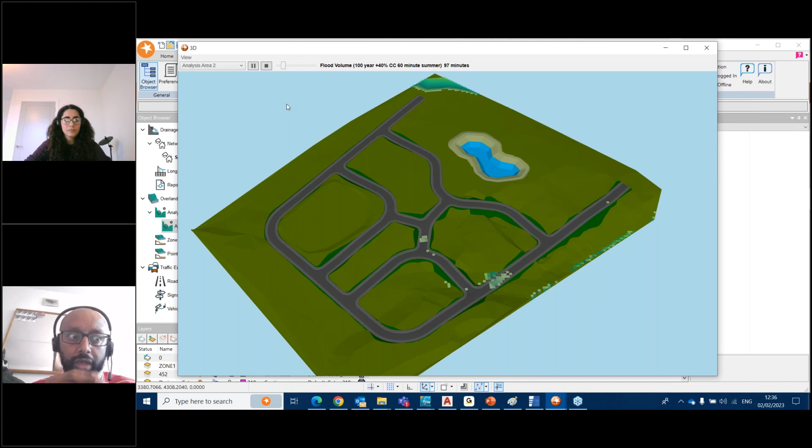So really important questions to address are overland flooding analysis, ground modeling, and pre-development assessment you could do for a site. We grouped them together because they work within the Flow software as well as the other graphical tools we have, so I'll go through the design processes methodically.

Before we start, it's worth mentioning there's a product called Live Design that allows you to do ground modeling, road design, alignment design, drainage design, overland flow analysis, and traffic management system, all integrated holistically. As you adjust one aspect, everything else cascades accordingly. That's still work in progress.

To answer the specific question about incorporating ground models, you can use ground modeling tools, and that means the ground model will exist in the background. I'll show you later about smart tools and smart surface, where you can also provide surface level elevation data for your drainage system.

We also have something called PDS. For those already familiar with it, it allows you to do road design as well as ground modeling in more detail than Live Design currently provides. So you can originate from any of those three tools, and the ground model will then be part of your drainage system.

That's one aspect. Dealing with overland flooding analysis is where I think I can demonstrate more effectively, given we have the ground model. At the outline stage, when doing a preliminary assessment of a site, it's a good idea to look at the discharge rate based on pre-development calculations.

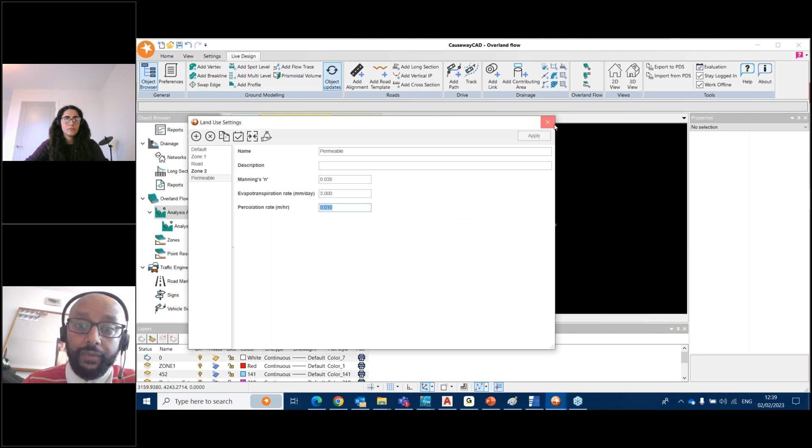To do an overland flow analysis, all you have to do is make sure you have a land use setting that allows you to set up things like the type of land you'll have, whether roughness, evapotranspiration, percolation rate, infiltration, etc., applied per zone on your site.

You'll also have what we call styles, where the display that's generated shows specific depths associated with a specific color, and you have the chance to adjust the depths, velocity, and hazard bands - all of this can be adjusted.

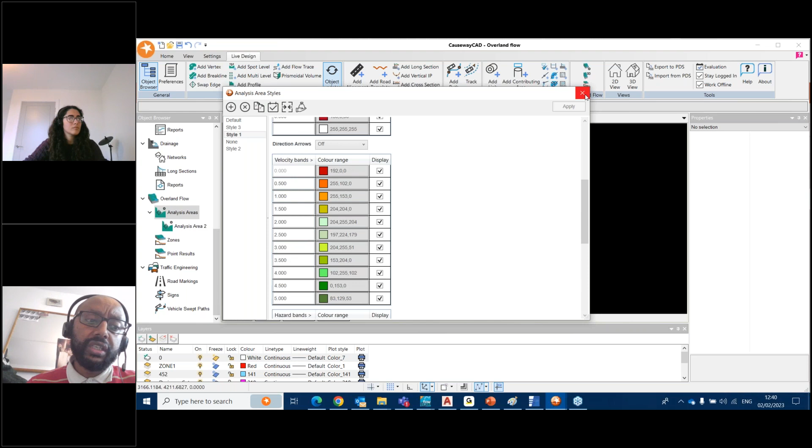All you have to do is select an add button, which allows you to add an analysis area that can then be adjusted - you can move it about and adjust it. You also have the chance to adjust the boundary conditions, whether closed or open boundary, etc., and then run the overland flooding analysis.

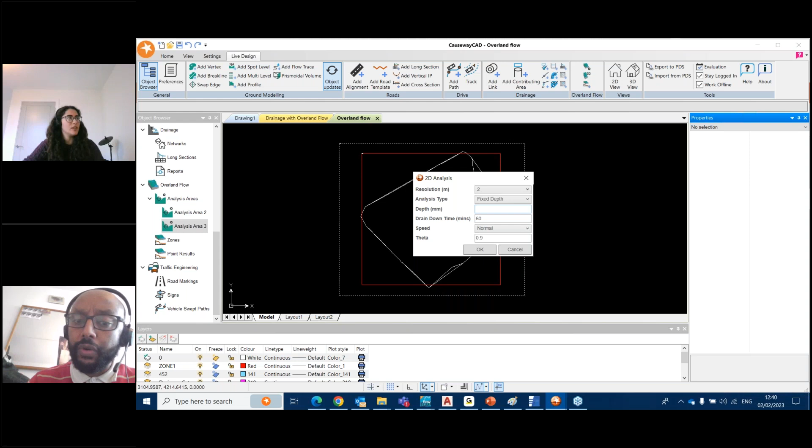If you run an overland flooding analysis, it gives you the chance to adjust things like the resolution, whether you're going to have a fixed rainfall in millimeters, or a specific rainfall profile applied on the site. You can also use synthetic rainfalls, and you have the chance to specify things like the drain down time, how long it's going to run for, and what type of analysis speed it's going to be run at. Once you've done that, it takes a little bit of time.

It gives you the chance to have an overland flow route for your site. That then means you can look at what type of velocity, what type of depth is generated, and where the flow goes.

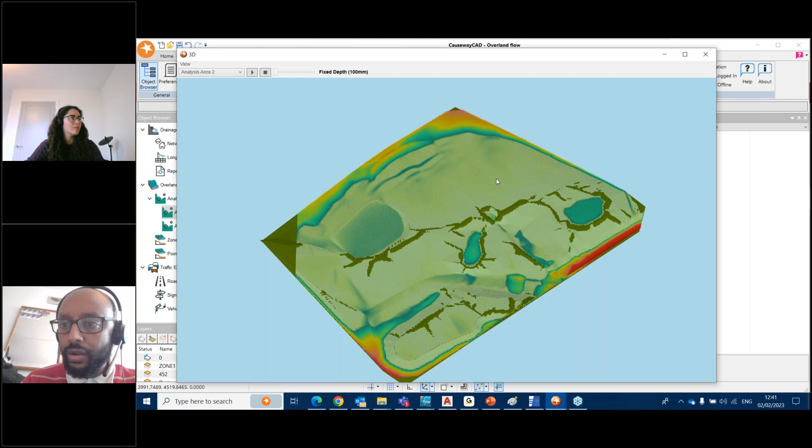Sorry, let me message... Okay, he's back. Sorry, you just had about 10 seconds of delay there as the overland analysis was running. Okay, sorry about that. Screen's back now, so you're all good. Yeah, it's... I don't know.

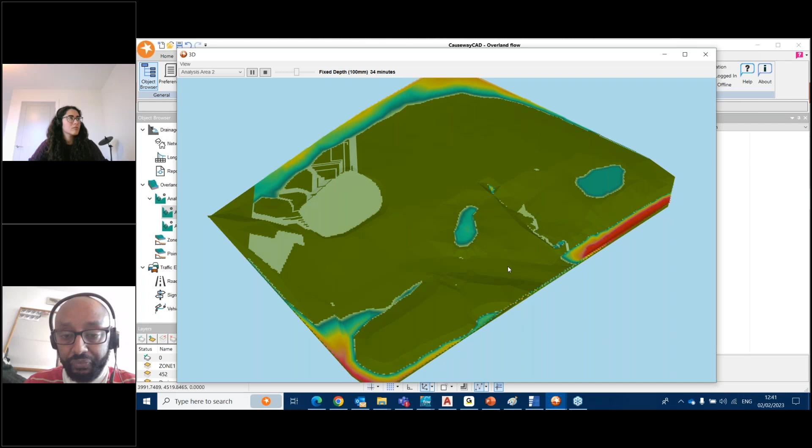Sorry about that. So it just allows you to run overland flow routes where you'll be able to identify what's called blue-green corridors, natural hydrology, where the water is going to gravitate towards. You can pretty much use that as a tool to decide where you could place your sustainable drainage structures, etc.

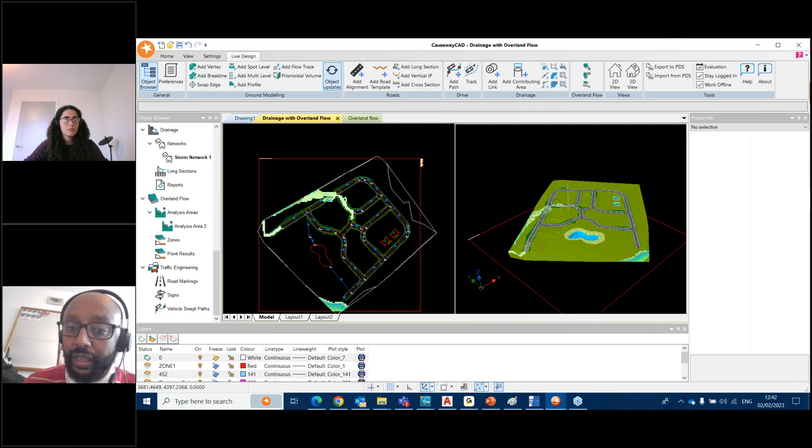That's one thing worth mentioning: if you have flooding from an already completed drainage system, and that flooding needs to be demonstrated to be contained within safe zones or public open spaces, you have the chance to also run overland flow routes based on the flooded volume. So you should be able to run what we call flooded volume associated with the critical storms that cause those floodings. All of that is something you can do from an overland flood analysis point of view.

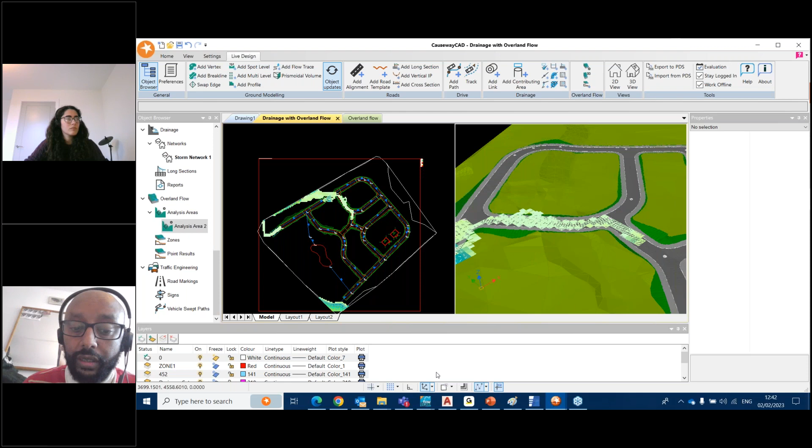From the outline drainage design point of view, what you could do is use what we call Sketch. If you notice in Flow, the design tree view on the left-hand side is structured to follow the pattern you'll use when you do design. So Sketch comes first, then simulation settings, then detailed design. That's on purpose, because Sketch allows you to do an overview, or think of it as preliminary outline, concept design of a scheme for your site.

That means you'll be in a position to have a good idea about the sizes and dimensions of the structures, the discharge limitations that are going to be imposed, and what type of capacity you should provide. That's something you can do by cascading structures.

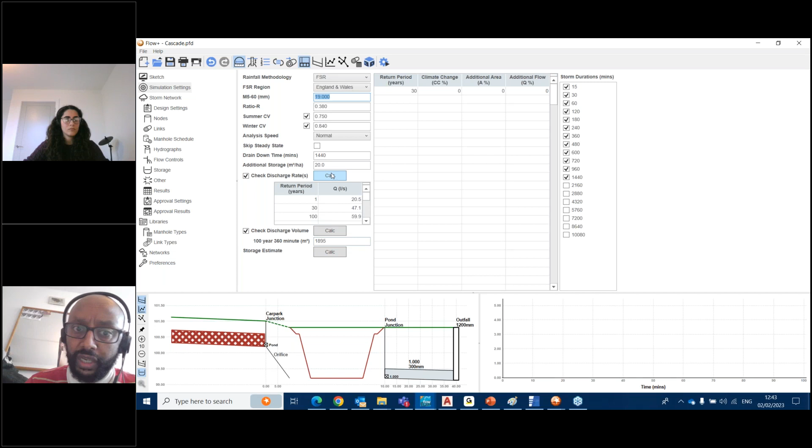In simulation settings, you could also do greenfield runoff rates, brownfield runoff rates, runoff volumes, etc., which I think there's going to be a question on later, which I'll discuss. In Sketch, you can just drag and drop storage structures. I've done a couple of them just so you could see. And one thing I've done, because there's a question about swale design, is show how you'll be able to design a link type as a swale.

This is something you can design freehand, things like the dimensions, the bed widths, the height, the auto increment, the side slopes, and the preferred cover, so you can associate it with the ground. If you select follow ground, and you have topography as mentioned in the question, that should automatically snap into the surface for you.

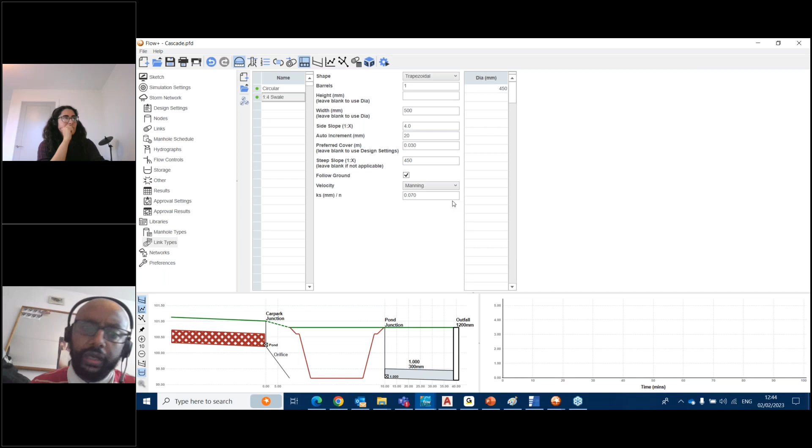You have the chance to also adjust things like the Manning's coefficient for the roughness associated with vegetation and gravel material, and there's good guidance in the SuDS manual as well as other documents on what type of Manning's value to apply. So you could basically create something like that, just so you could see, because you could technically create any type of network, any type of sustainable drainage system—these are the things we'll look at today, so we can see the full range of options available.

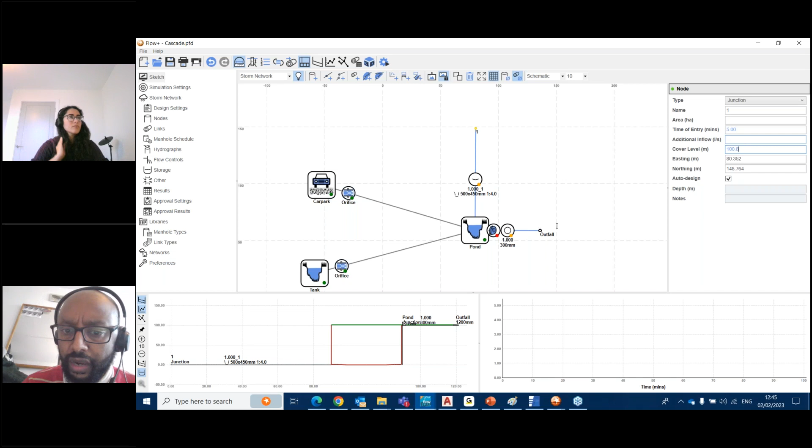That allows you to create the swale by just clicking an option, and that's something you could do with all other structures as well. This is just an example, and this then allows you to specify things like the name of the node and the cover level. Let's say I have something like that for the cover level. And you can then specify things like the lengths, because there is no coordinate or no concept of dimensions in a schematic view for outline design.

Obviously, you could do that in Live Design or PDS or Smart Tools. That basically is something you need to be in control of, and that allows you to do that. And you'll see the swale will be automatically designed, and you'll be able to also specify things like contributing areas as a node, or contributing areas as a lateral link. That basically is area coming in along the length of a link, like an open section. And this means you will be a little bit closer to what happens in reality, obviously.

And you can adjust things like the slopes by manually adjusting the level, so you can automate that. And once you have done that, you can also specify things like infiltration rate. So you can apply infiltration rate for the swale or any type of structure, which we'll discuss in more detail a bit later, because we have quite a few questions on that. And that should turn into a different color to show you we have a green infiltrating structure, if you have an infiltration. And that then means you can obviously analyze the network.

One of the most important points about the outline design is that it's going to be linked with the full hydraulic engine that is capable of modeling anything to do with 1D system, reverse flow, backwater, pressurized flow, surface ponding, surcharging, etc. It gives you the chance to model the outline design accurately. So you don't have the limitation of assuming the downstream storage structure will be oversized because there's no concept of backwater. In this case, there's going to be a backwater, definitely. And you'll see that when the water reaches a certain level, the hydraulic grade line will be straight. And that is a sign that you have backwater and reverse flow, etc.

So that means the hydraulic analysis and the results that are going to be generated, and the volume and the capacity that you are able to capture, will mean you have the confidence when you turn this into detail. There isn't going to be any surprise. There isn't going to be any major change in the capacity you need to provide. So all the structures that you can think of can be designed this way as an outline concept design, or you can use a similar concept for the detail design, which I'll show you a bit later as well as an example. Okay. But for now, I think that should capture all the four questions. Whistle-stop tour there of the outline and a sort of preliminary design.

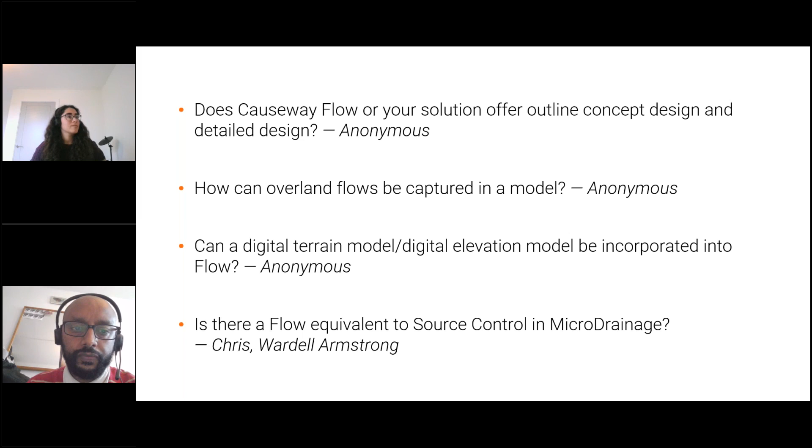Okay, next question. I want to design a pond and connect it to another pond. Is it possible? Yeah, and I think with this question, we'll have an example later, but yes, you can is the answer. Not only can you by using a link, you could actually have something like overflow loops as well.

As you saw in the outline design, you could actually connect structures using a weir or orifice or something like that, which means technically there isn't going to be any time of concentration or any time of travel. There's no concept of water inflowing and outflowing from a structure, so that connection could just be volume transfer. That's the easiest way of doing that, or you could actually connect them using links between the ponds. So that's something we could have a look at later.

Yeah, brilliant. Okay, thanks, Net.

Okay, how do you model submerged outfalls? Okay, that means I probably need to share my screen. So let me share my screen again. Right, time is going on again.

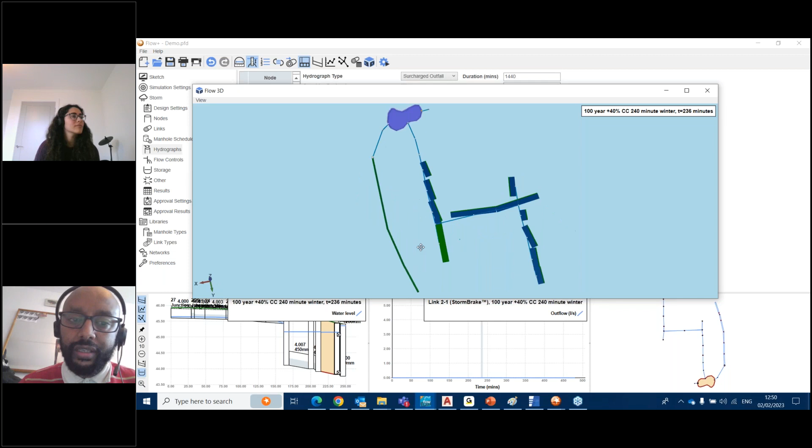Yes. So submerged outfall, that's something I prepared earlier. This is basically a cascaded system of sustainable drainage systems that you could do. This is not concept design, this is actually detailed design. What you could do is, if you go to hydrographs, in hydrographs there's many options that you could basically use to adjust the inflows or the outflows. Basically it is to do with affecting what is going in and what's leaving the network. And I'll deal with the inflows a bit later, because we have a few questions to deal with that.

But when it comes to the outflow, the surcharge outflow, specifically the question about submerged outfall, if you want to essentially adjust the outflow, what you need to do is select the Surcharged Outfall, specify the duration of how long it is going to be submerged for, or you could actually specify any random one. It doesn't matter. The main thing that matters is the time step and what you put in the depths. So the time step is going to be essentially, if you have differences, like in this case, I just block the outflow. Basically, the outflow is 1.649.

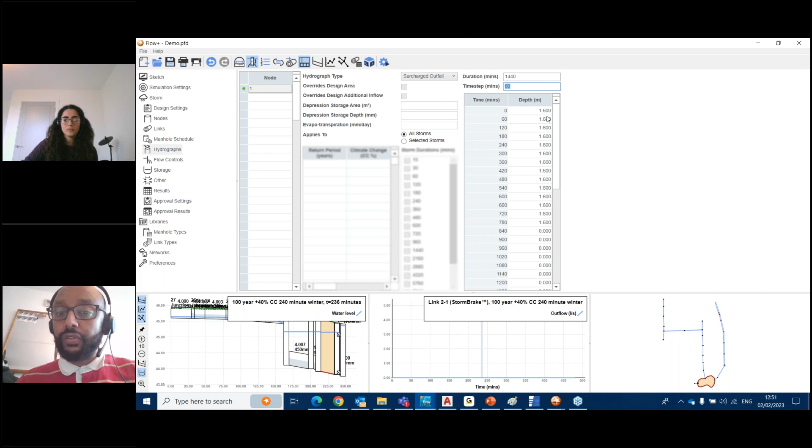You have a small pipe diameter, so that basically means, as long as the hydraulic head is at that point, it will block the outflow. And that's going to be blocked for 780 minutes, for example. This is actually a very active project that I help support. That was a drainage system discharging into a coast, and they were told there is going to be a tidal wave that closes the discharge for about 780 minutes.

So what you could do is just say, I'm going to close it for 780 minutes by making sure that depth is close to the cover level. That means you always assume there's going to be a flap valve at the outflow. So it's going to close the flap valve for the 780 minutes. So when you run the analysis, you'll see the discharge is going to be 0 if you have less than 780 minutes, like in this case 240 minutes, you'll see there's 0 discharge there. And the moment we go beyond that, you'll start seeing discharge that's going to appear after the 780 minutes, as you can see. So there's going to be discharge generated.

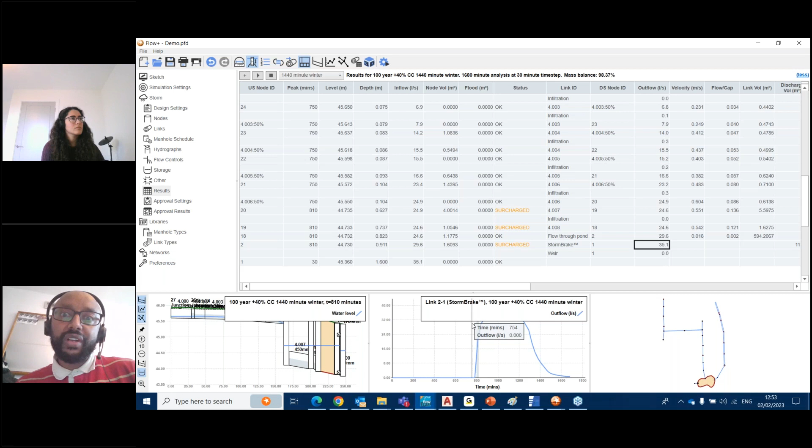So that is the easiest way, and you could vary it, depending on whether you have a full idea about the submerged outfall data that could be provided by the EA, or people who are going to manage the rivers or coast, or whoever the approval body is going to be. You should be able to have that information. So you could use a copy paste mechanism, right? Any of the spreadsheets you see in Flow, you could copy and paste using Control C, Control V. So not only the hydrographs here, but you could copy and paste your networks as well, if you like. So you should be able to transfer any information you have about the submerged outfall that you need to simulate. So that's how you do submerged outfall.

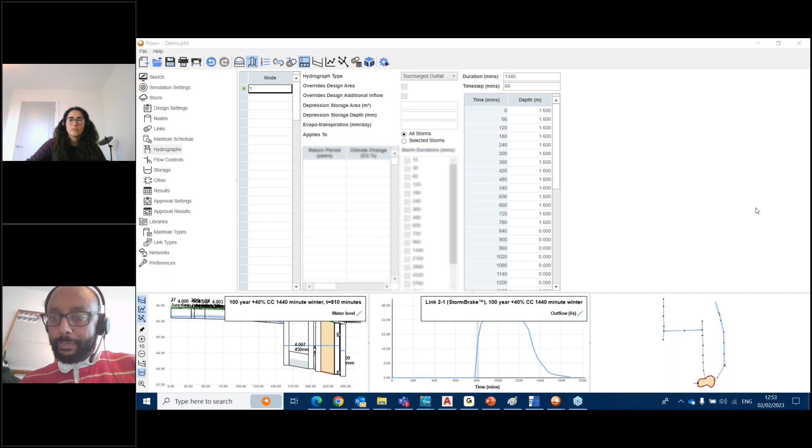Perfect. That's great. Should we go on to the next one? Yep.

Okie doke. So yeah, lots of SuDS questions before the webinar that we received. I suppose it has something to do with the Schedule 3 announcement. So, understanding what kinds of SuDS measures can be modelled. Can you set up a rain garden simulation in Flow, and green-blue roofs? So lots of different types of sustainable drainage systems. All are possible in Flow. Net, can you show us how?

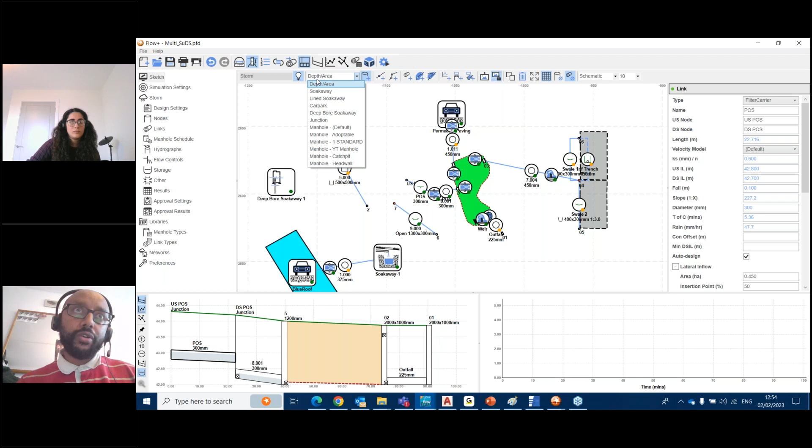Yeah, I mean, obviously I cannot cover every single thing that is listed here, but I can show you something like a rain garden. There are different ways. The main thing to recognize about Flow is when it comes to sustainable drainage systems or any type of storage structure, you could design them using very few templates that we have. I think this is something we will need to ask your feedback for. So if you have a very strong opinion about having a template, please let us know, because we are considering it. But so far, our approach has been to make it as open as possible.

So you could design the traditional way, where you'll be able to place storage structures like a depth area, which allows you to design anything. Then soakaways, lined soakaways, car parks, deep bore soakaways, which are basically templates that allow you to have specific types of structures, and everything else which should be captured within that. But it's obviously not sufficient to just say that should be the way you design it.

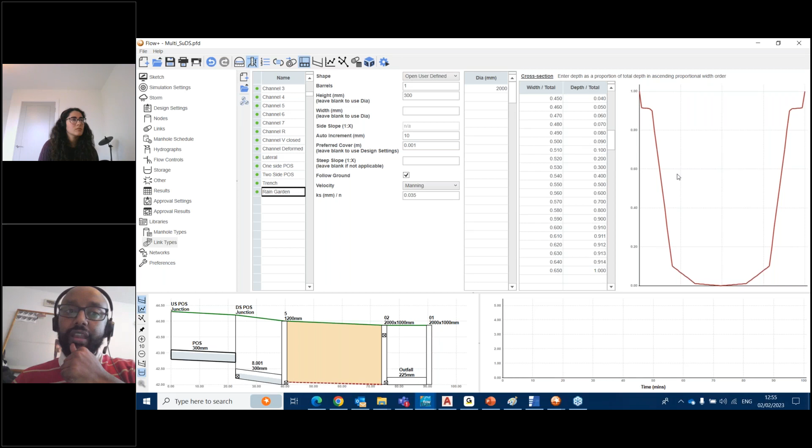We opened it up a little bit as well, because we have something called flow through pond, and we have something called link types that allow you to design the shapes and sizes. So this is one of the things that allows you to, for example, design something like a rain garden. So you'll be able to create the shape similar to what we have done earlier, and design things like a rain garden.

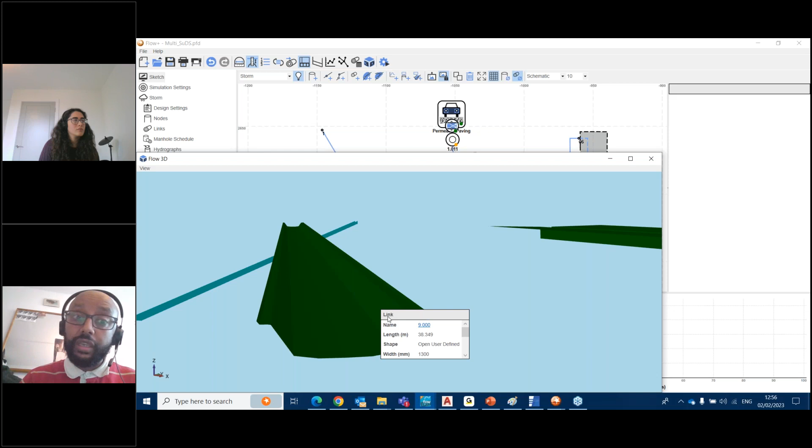You could incorporate it as part of your main drainage or detailed drainage, if you like, but I'm just showing you here. And if you do it as a link, it means if you have a different porosity rate, you'll have to consider that porosity by resizing the shape. And just before I conclude that, it should also mean you'll be able to make that infiltrate, right? So similar to what we have done earlier, you can apply infiltration rate, etc., to a rain garden.

But you could also use what I call a flow through pond, right? Flow through pond is one of those important structures that is worth talking about, because even though it says it is a pond, think of it as a flow through any structure, because it allows you to create any shape you like. So if you have a shape that is going to look like, let's say this, just outline it. You could outline the shape, by the way, in Smart Tools, in Live Design, in PDS as well. And as you go through outlining the shape, it will actually be updated for you.

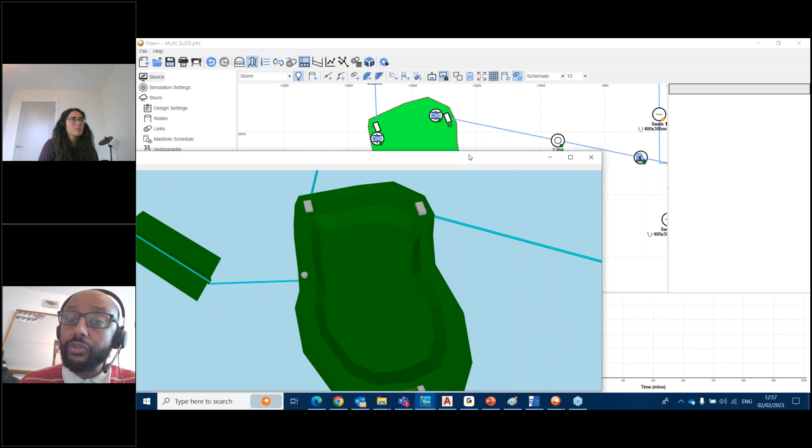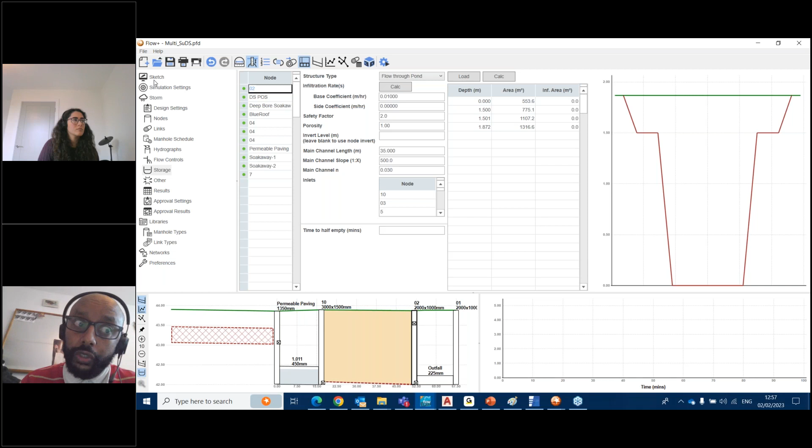It allows you to have, as you can see, the inlets in their true geographical location, the outlet in its true geographical location. You should also see things like main channel length, average slope, and Manning's, the roughness associated with the different types of vegetation and gravel material you could have. So you could use these as well if you like, but you could shrink the size and create the shape. And that also means you'll be able to specify things like the porosity rate, etc. So that is something you could use as a rain garden as well.

There is also a question about blue roofs, green roofs. One of the main important aspects of things like blue roof, green roof is to consider what is happening to the rainfall before it gets into the drainage system, to either be stored in a crate or go to the downstream end. And there is what I call blue roof, but you could interchangeably use it in some instances. There isn't specific guidance out there. That's the reason why we don't have a specific template to say this is how you should use it.

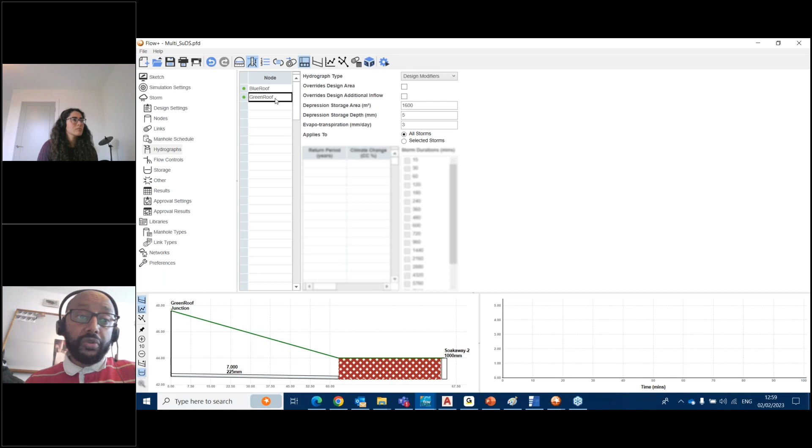But what you need to consider, if you want to consider the elongated inflow, because the water has to percolate through different membranes, soil or other manufactured membranes, is an elongated inflow. And that is something you could do by going into hydrographs and adjusting the time area by specifying the duration and the time step. You could also specify things like depression storage and evapotranspiration for the losses. There is also the possibility to ignore all of that and assume you have saturation, worst case scenario, and just say there's going to be some depression storage and evapotranspiration, without an elongated inflow. Anywhere between the two is basically the right approach.

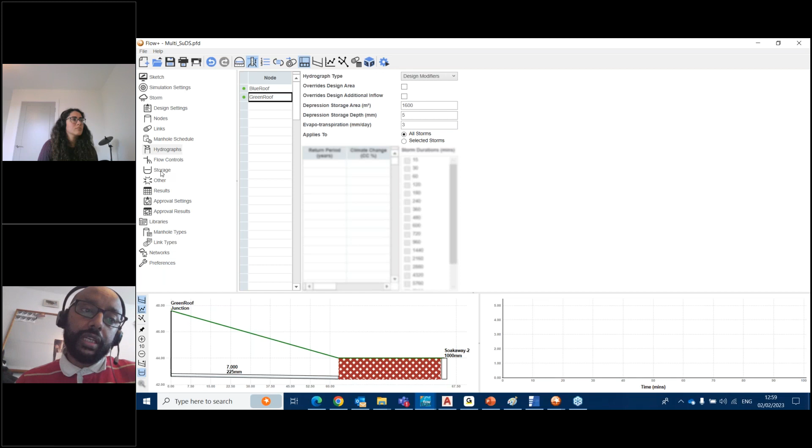And hopefully there's going to be guidance soon, because I know they're working on it, CIRIA is working on it. So once we have that, we will have authoritative guidance so we can implement it in the software. So we're waiting for that basically. Nowadays with blue roofs, there is something called a crate that you could put on the roof. I don't know if you are aware.

So that basically allows you to store the water, and you'll be able to specify that as a car park, or you could obviously use any of the other mechanisms as I showed you, but this allows you to represent the storage capacity you have on the roof, and you can obviously limit the discharge from the crate as well using flow controls.

So those are really the main approaches, but obviously the devil is in the detail, and this is something we can go through when we have a little bit more time. But it is possible, as you can see, to design any type of blue roof or green roof, but you just need to have an understanding of how the software is able to work instead of a template to look for, right? So that's the main thing to remember. There are obviously many different ways.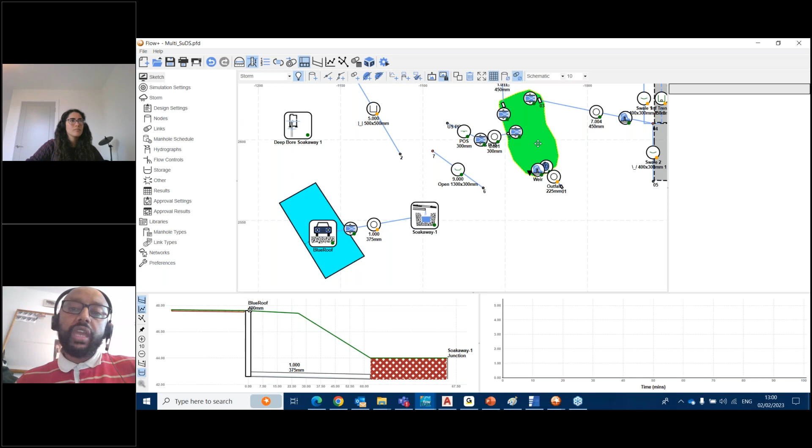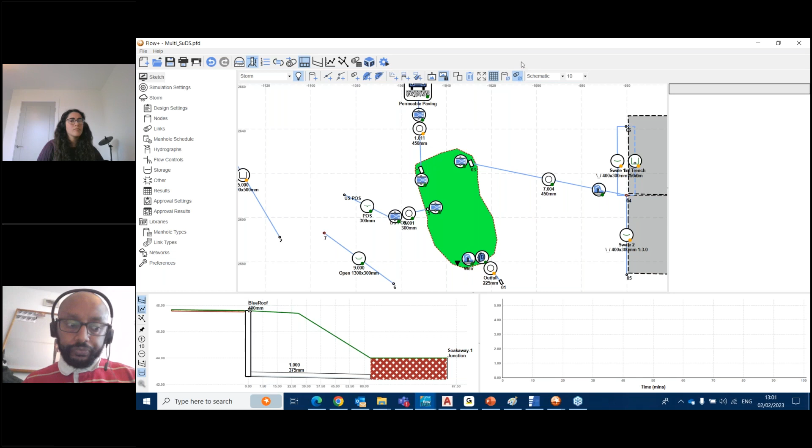One last point to make before I conclude: when it comes to storage structures that you design, if it is very important for you to make sure the inlets and the outlets are in the true geographical location, not only a representation of what the dimension looks like, it's very important to consider flow-through ponds. Even though it says it's a flow-through pond, it's actually a structure. Think of it as any structure, because you could adjust the depth area table and adjust the dimensions. So that should allow you to represent any type of storage structure, basically. So I hope that answers the question.

Thanks, Ned. Just got a live one that's come through that might be worth answering now as well. Does that mean it's possible to model two separate outfalls into a soakaway as well? Absolutely. Yes, 100%. You could have as many outflows as you like.

There's a question about Flow Plus, which I'll answer later, but with Flow Plus, you should be able to do what's called multiple outflows. That means outflowing into a watercourse or main drain or whatever. But you should also be able to outflow into a soakaway or a pond or bioretention in multiple directions, and that's basically what a flow-through pond considers. So yes, that's correct. Brilliant. Thank you.

Okay, should we go on to the next one? Yeah. Let's go for the next one.

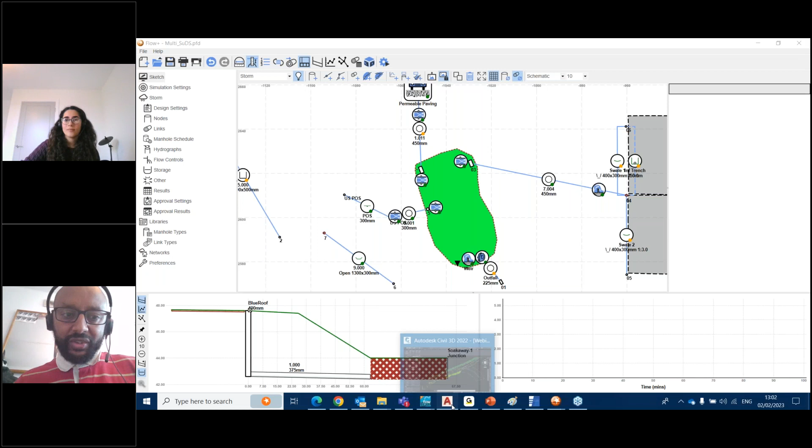Good stuff. Okay, so we had a few questions on smart tools. Can surfaces from Civil 3D be incorporated and then cover levels assigned from these? And then another one around importing surfaces. So I think that requires another demo. Yes, absolutely. Let me share my screen, and you should be able to see my screen.

For those of you who are not aware of smart tools, we have a module that works embedded in AutoCAD or Civil 3D. Both AutoCAD and Civil 3D have the same workflow. The only difference with Civil 3D is you'll be able to incorporate the surface live, and you'll be able to import a Civil 3D network too. So that's the only difference, but all the ribbons and icons are the same.

So smart tools allows you to do an outline design as well as a detail design, as well as drawing production, pretty much everything you expect from a graphical interface. But the BIM output is what makes it stand out, because it allows you to have a full BIM output that contains all the constituents of your design, not only the hydraulic aspect, but also the construction aspect, things like the bedding, the surround, the trench size, the backfill, the material, the thickness. So that's something that is important to point out.

But coming back to the question, it comprises smart surface that allows you to incorporate surfaces from Civil 3D, or the ground modeling tools that you saw earlier from Live Design or PDS, which you can use by selecting the surface from Civil 3D option or surface from 3D faces. If it is Civil 3D, to answer that question, you should be able to select that, and that imports the Civil 3D surface. If you have it open, it should be live.

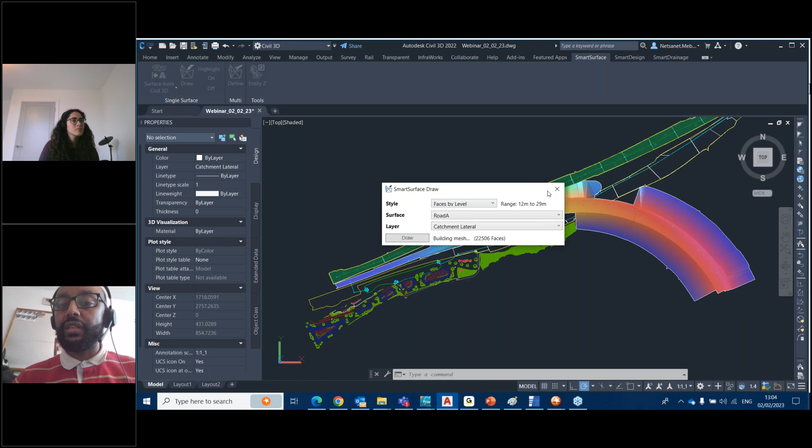We have road A and road B. And once you have incorporated the surface, you should be able to essentially show the height map so that you can see where the surface is and so on. So you'll be able to see, for example, in this case, I have an overpass and underpass, and that's something you could easily understand and visualize, etc.

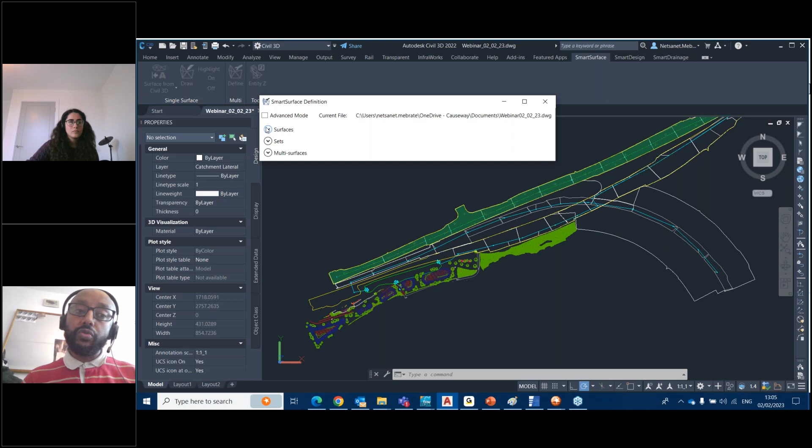What makes Smart Surface smart is not only that it allows you to load data and stuff like that, it allows you to incorporate what we call multi-surface. So you'll be able to load as many surfaces as you like. You can then combine them in different sets. So you can say, okay, this set is going to contain these surfaces. So you can have proposed surface, existing surface, and you can layer them up, so you can prioritize them.

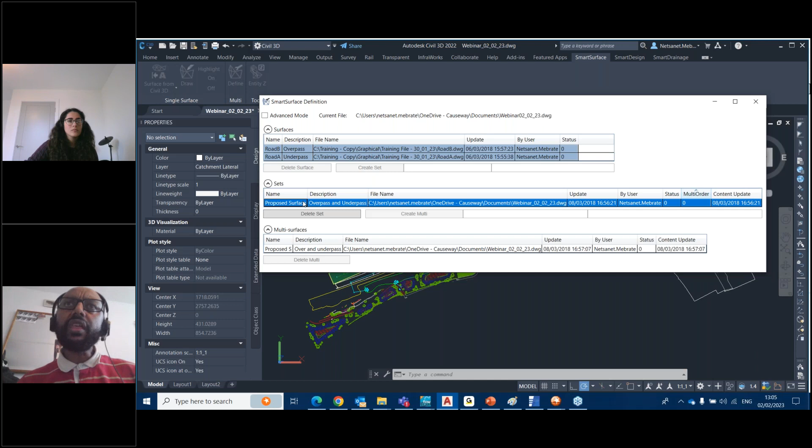So you could say, if I happen to have the drainage system at that point, please make sure you use a proposed surface instead of existing, because I prioritize the proposed. But in the absence of that, you can use existing, right? So you could adjust the priority order, and that's going to automatically give you the exact surface that you need. And you can then select the multi-surface here, or you can individually select each particular surface that you have loaded.

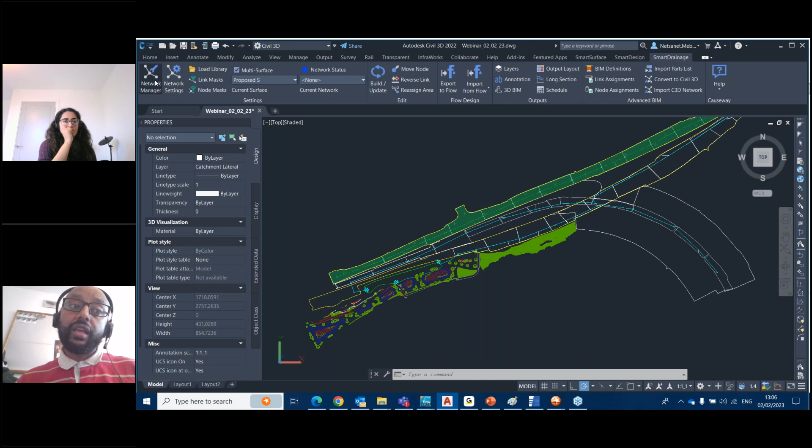And what that technically means is you should be able to model a drainage system for something like a spaghetti junction. Basically, grade-separated levels, really complex surfaces can be modeled using the surface. And with the drainage system, you should be able to use smart tools or smart drainage, so you could see how easy it is. You just need to do what we call setup of associating which layers or which line type or block is going to contain the manholes and links, etc.

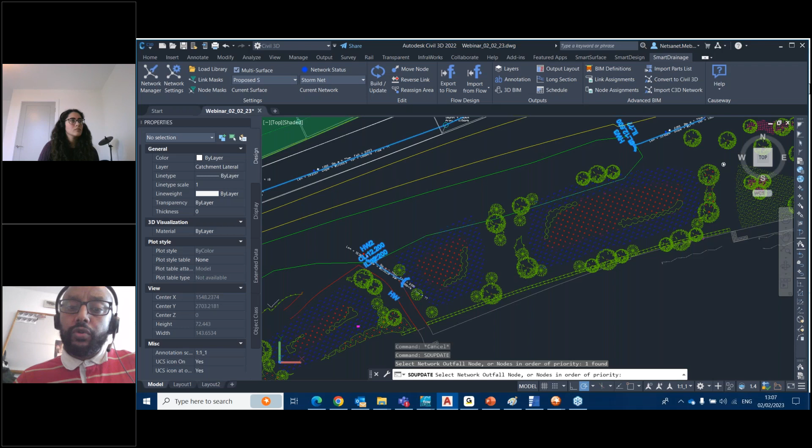But this is a drawing that is comprised of a polyline, a line, a block, a circle, an ellipse, basically contributing area as a polygon or polyline. Essentially, any CAD drawing can be transformed into a drainage system. So you could select the build update button, specify which one is for node, and it builds a drainage system for you at a click of a button, as you can see.

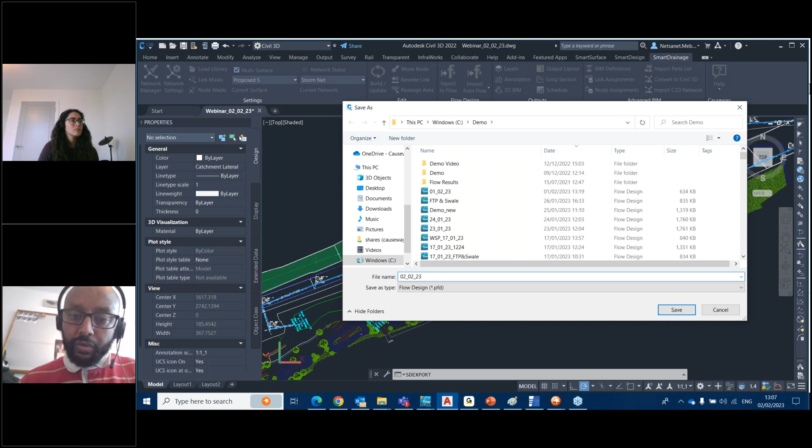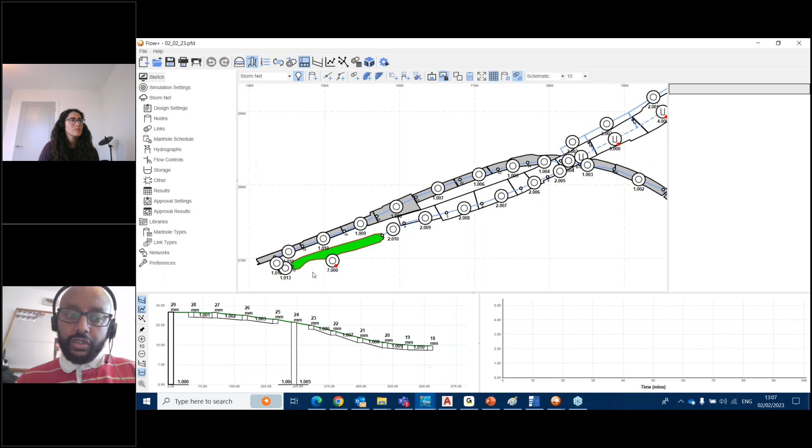Once you have that, because I have the smart surface as part of the surface, and here's one of the questions we had, how do you incorporate that? You'll be able to say, okay, can I have that exported, and I'll just load that file so you could see, and then, magically, it will transform the entire network as we drew them. So you should be able to see the file that we created, and you should be able to see the drainage system. So you could see the flow through pond, the contributing areas, everything that we had exactly as we intended it to be imported.

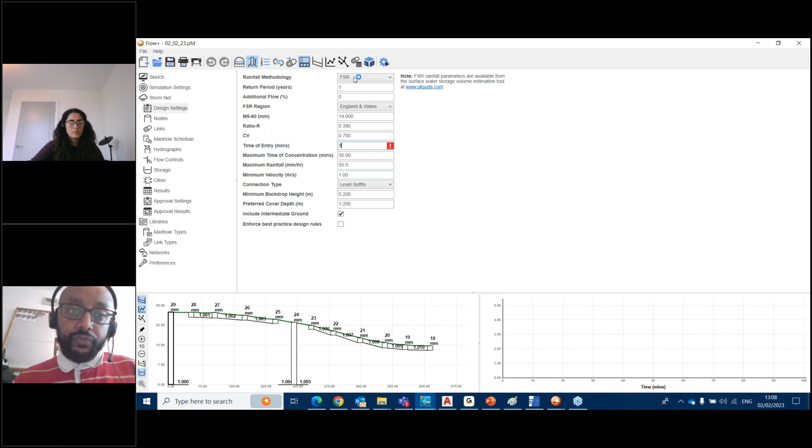And all you have to do is specify things like the design settings. This is something which should be very familiar for all of you. So for the time being I'll just do it very quickly, and that should transform the drainage system, as you can see. Not only that, as I mentioned earlier, if you want to have, for example, a channel at the top and main drain underneath, it will actually transform that exactly as intended.

So it allows you not only to have things like the cover level, the easting and northing, etc., automatically transferred into Flow at a click of a button, but it will actually know where each link is going to be in relation to the cover based on the preferred cover you set. So all of that is automated for you. And because we have the optimization option that allows you to satisfy things like self-cleaning velocity and preferred cover and so on, those should automatically be satisfied for you too.

That is something we can look at in more detailed sessions, but it gives you the chance to transform a very simple drawing into a more complex detailed design without a lot of effort. So that hopefully quickly demonstrates what SmartDrainage does, as well as the surface part.

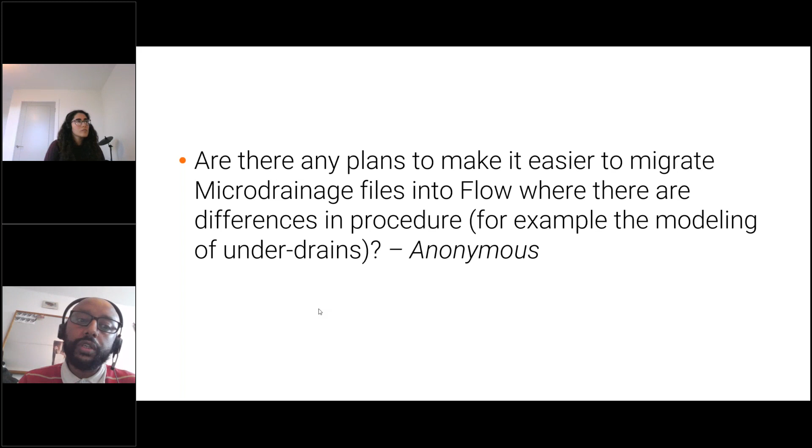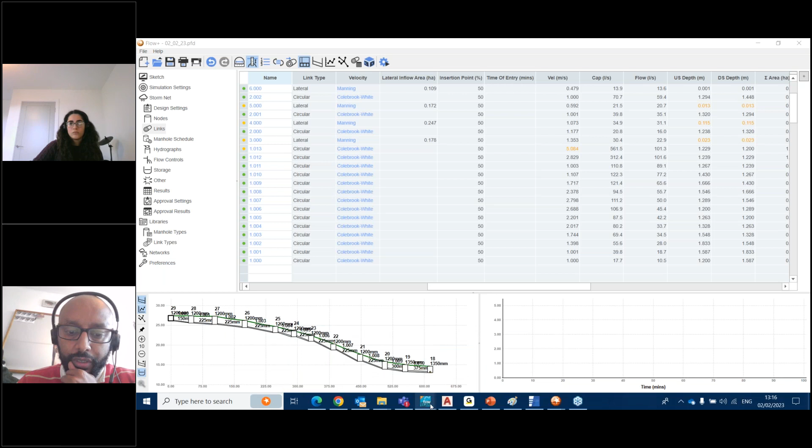Okay, great, thank you. Right, question from Seb: how exactly does the brownfield runoff estimation work in Flow? Let's do a quick screen share, and then I probably need to talk around it.

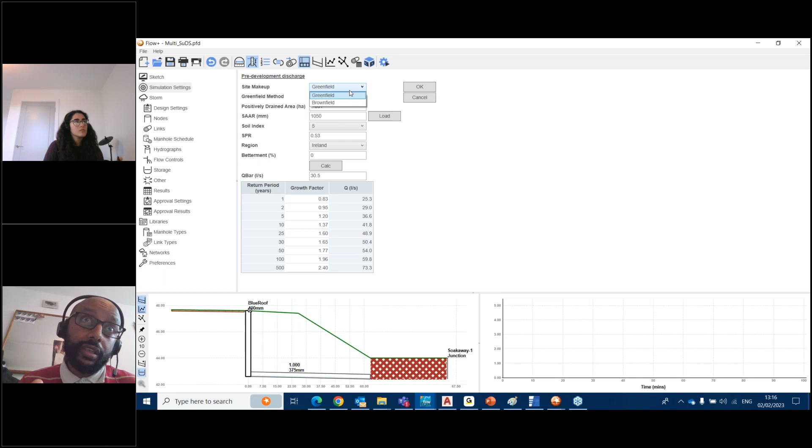When it comes to brownfield runoff rate, there is what I call best practice, which should essentially assume there's an existing system already. The best case scenario will be to model the existing drainage system and hydraulically analyze it to see the discharge that's going to be generated. That assumes obviously you have information about the existing drainage system, which sometimes might be lacking.

In the absence of that information, you can either assume a clay type of soil with probably adjusted growth factors to increase the runoff, or use the modified rational method. With the modified rational method, you'll be able to know the contributing area, the percentage impermeability, and CV, which is obviously something that can be adjusted, but you can specify it as a factor. Those variables are easy to know.

The most difficult part is the time of concentration, because time of concentration is the time of entry plus time of travel, which is not an easy thing to guess or estimate just by looking at the site. That's where you need to exercise your engineering judgment when it comes to runoff rate. For example, if I specify 100 for time of concentration, the amount generated is going to be completely different than if I have 10. The shorter the time of concentration, the more inflow you get, and the longer the time of concentration, the smaller the discharge is going to be. That's something that needs to be estimated by you, and that's the tricky part.

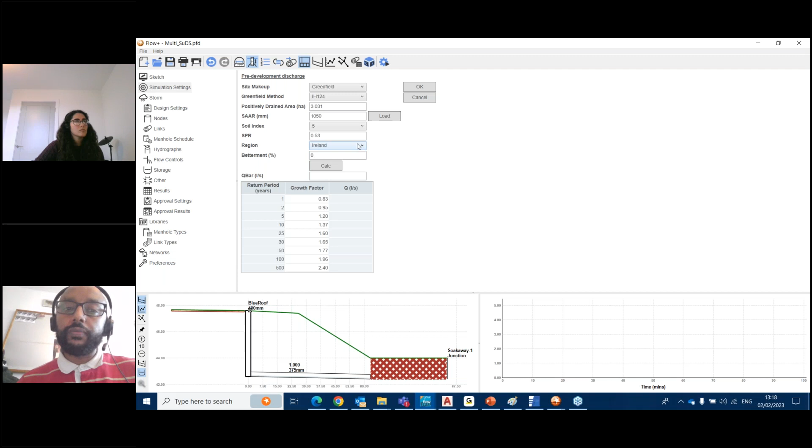Okay, great, thank you. Right, we've got probably about 5 to 7 minutes more of questions.

Your thoughts on how to model permeable driveway storage with individual flow controls connected as junctions to the main sewer in the road—I know you can set the point of connection as a junction, but how would you number the pipes?

I think with that, probably try using a boxed link type, like a rectangular closed section as a link type, so you'll be able to have the permeable pavings as a link, and then you have the downstream node or junction. You could use a junction instead of a manhole. That's probably easier to model than the typical way of specifying the same node, the same junction, and then specifying the car park on that specific junction at the same time. So if you are struggling to do that, I can show you, Tony, given we have a small amount of time.

It's probably easier to just show you that, but I could quickly load a file that does design a car park as a link type of design. So I might as well just quickly show you that. Any sort of specific queries?

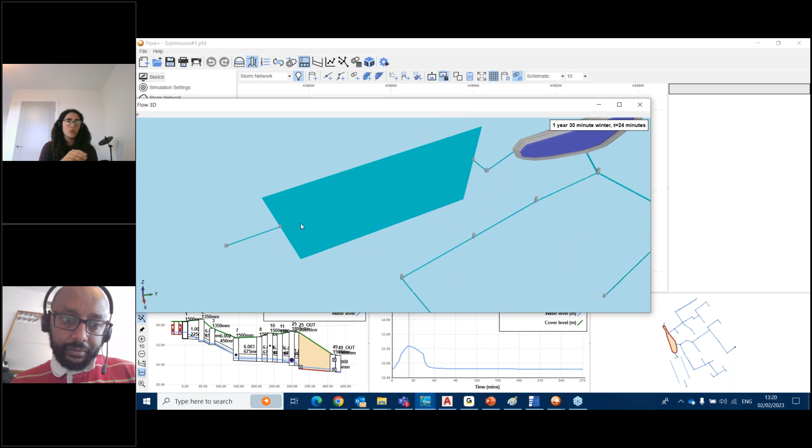There's a support portal that's included as part of the subscription if you're an existing Flow customer. So support.causeway.com, where you can submit a specific question, attach a file, and someone will get back to you that way. That's always available throughout the week, definitely available.

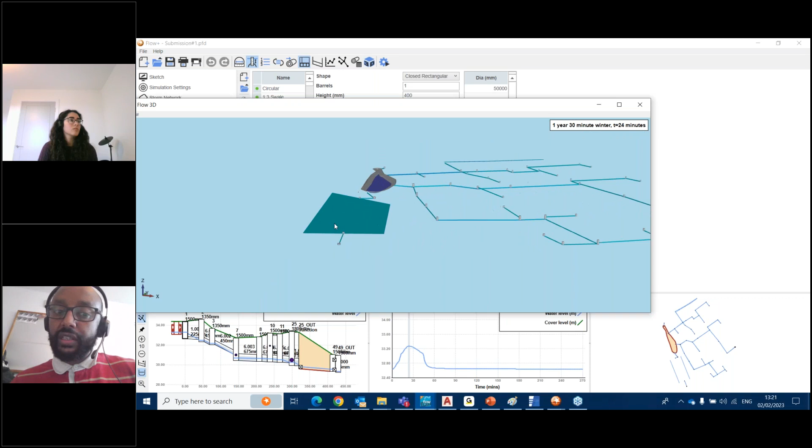So for the car park, you could just use a closed rectangular section, specify the dimensions, and basically make that a link, as we did earlier for the swale and rain garden. That should be represented as a link, and you should be able to specify the downstream node as a junction. You could actually make that a junction - it doesn't have to be a chamber.

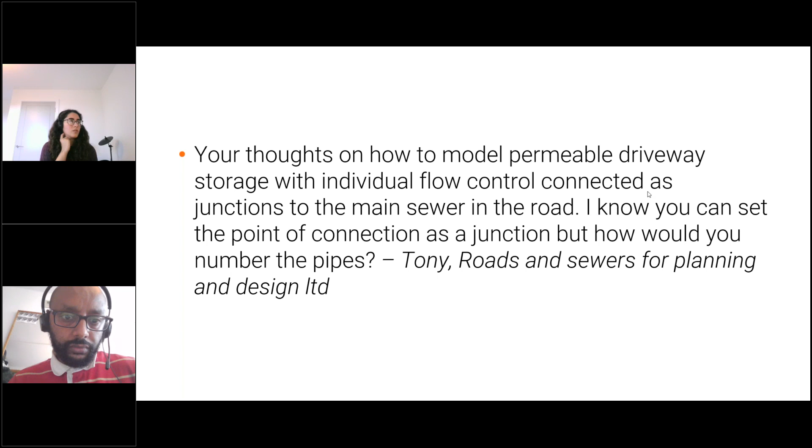It should allow you to loop to any point as well. So if you have an overflow and you're basically overflowing into a public open space, you should be able to specify the invert level at that overflow point, and use an offline loop. Basically, if you specify an offline control, it should allow you to loop to any point - you could design the public open space like a sport pitch, car park, or public park, and you'll be able to loop to that. That's something you could do in the software using offline loops.

That would be an overflow. And then, because we have Flow Plus that allows you to design anything you like, you could even have a negative backdrop if you like. You should also be able to do an overflow pipe or any link type that you can design as a structure. So if you have a footpath or something like that, you could actually create the shape of the footpath to use as an overflow.

So it's a matter of which way you want to go through the design. If you want to be very detailed, you could create your own shape for the overflow - if it's going to be footpaths, you could create the exact dimensions, widths, and maximum capable depths that could channel the water. That's something you could do as a link type, specifying the overflow point, and then create another link wherever you want to overflow to.

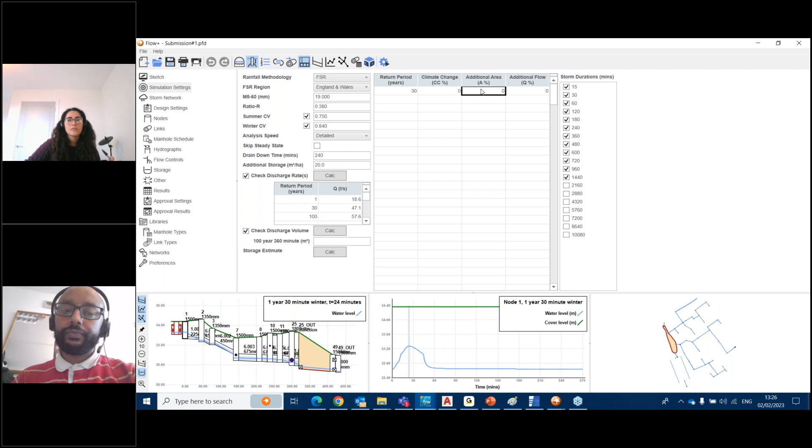Okay, perfect. All right, 4 minutes left. Do you think we've got time for one more? Yes, let's do one more, definitely. Yep.

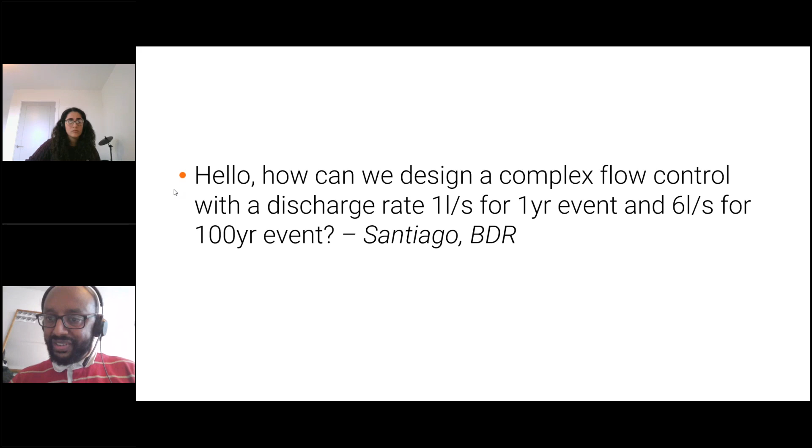Okay, how can we design a complex flow control with a discharge rate of 1 litre per second for a 1-year event and 6 litres per second for a 100-year event? So around flow controls there. Yeah, so something that I can show you, hopefully, let me share my screen. So with complex control, or what I call compound control, you should be able to have multiple online or offline controls. All you have to do is make sure you have the correct design depths and the expected design flow.

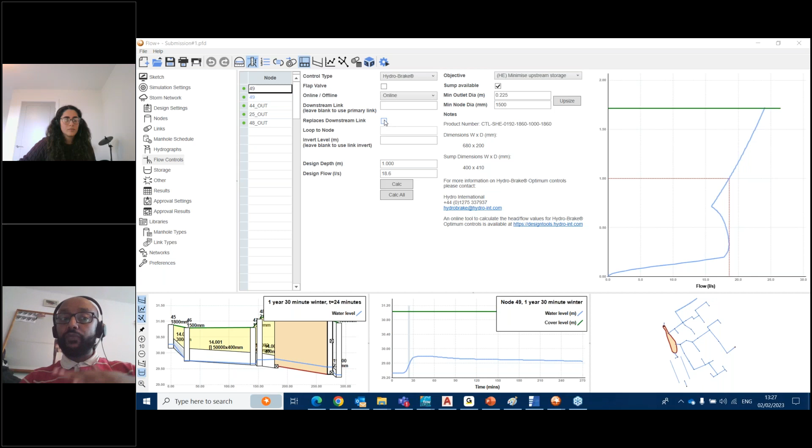So if you have, as you said, 1 litre per second, you specify the maximum depth you expect for the 1-year return period and specify the 1 litre per second here, and then you go for the second one and you specify the maximum depth you expect for the 30-year, 100-year. You specify the maximum design depth here and you hit the calc all button, because you need to make sure both flow controls, because they will be operating until the maximum depths, come into play when determining what dimension the second one is going to be. But the second one can be at any point above the invert level. So that's something you need to be aware of.

You need to make sure you specify it at the expected 1-year invert level maximum depth, and then you'll be able to specify the maximum discharge that's going to be generated by both. And you don't hit this calc button, you hit the calc all button. That allows you to calculate how much discharge is going to be generated with the first flow control and how much discharge should remain to be discharged by this flow control. So that's basically how you do compound flow control.

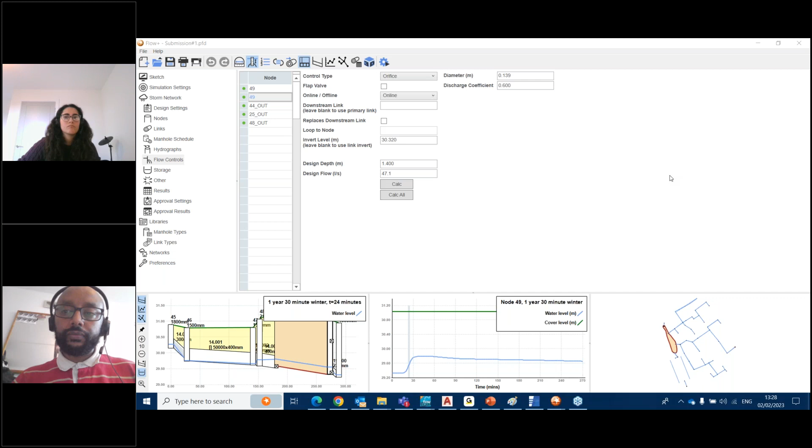Okay, fab. That's good. I noticed there were a few seconds where your audio cut out again. It was pointing out to the Hydro International website because there's a live link there. I don't know if anyone else had that audio drop out, but that's probably why. Okay.